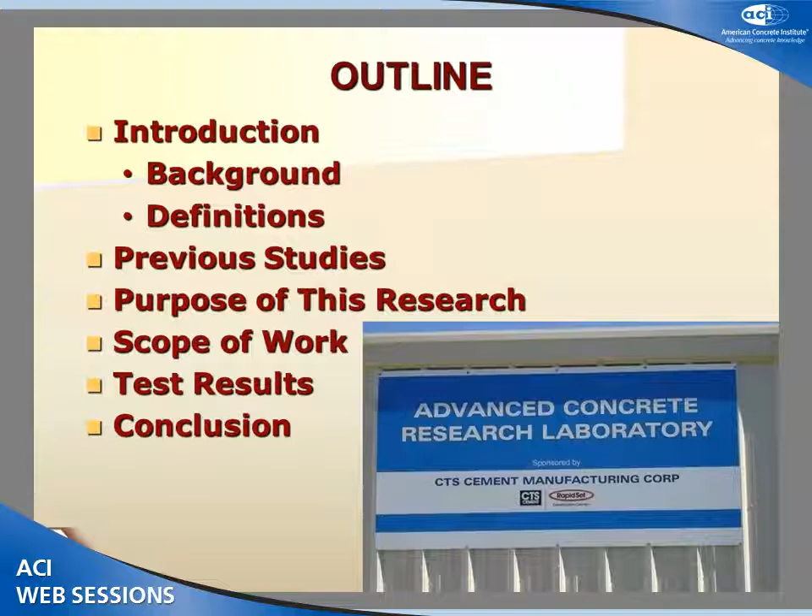About 2/3 of all the concrete in the world is used as slabs on ground, and many problems are encountered in practice with slabs on ground. As a huge amount of the concrete is used as slabs on ground, the maintenance becomes a concern.

One of the major causes of the maintenance needs for slabs on ground is the volumetric distortion of slabs, which is commonly caused by drying shrinkage. Drying shrinkage results in cracking in the concrete, and if drying shrinkage is not controlled, it can lead to serious serviceability problems and performance problems.

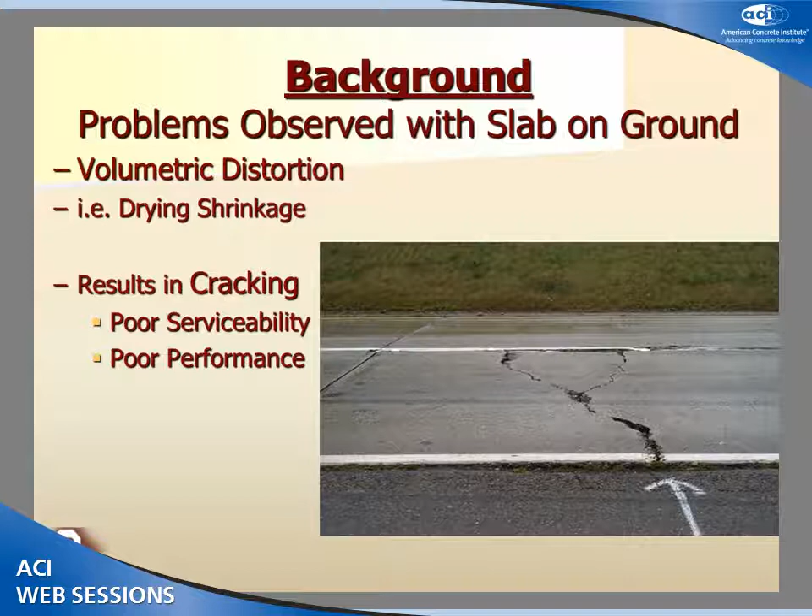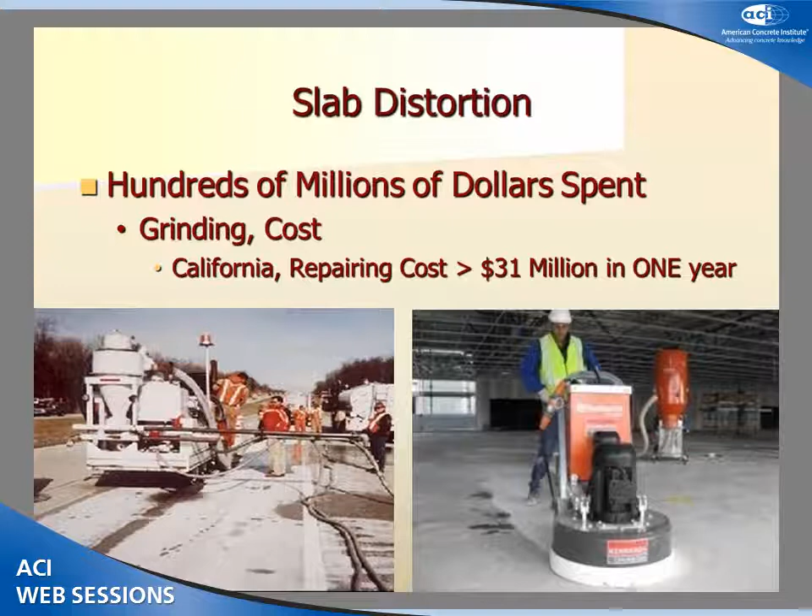So slab distortion occurs in all slabs on ground. As an example of its impact, hundreds of millions of dollars are being spent to repair slab distortion. Grinding is a common method used to repair the slabs, but it is very expensive. For example, the state of California spent over $31 million to repair its road only in 1 year. So if we could prevent or at least reduce the effect of drying shrinkage, we can save money and time.

So what is drying shrinkage? Drying shrinkage is defined as reduction in volume of the concrete due to loss of water. When the concrete dries, the free water evaporates from the top surface of the concrete. So the top surface of concrete shrinks, while the bottom surface and core of the slab concrete doesn't tend to shrink as much as the top surface. So a differential shrinkage develops through the depth of the slabs.

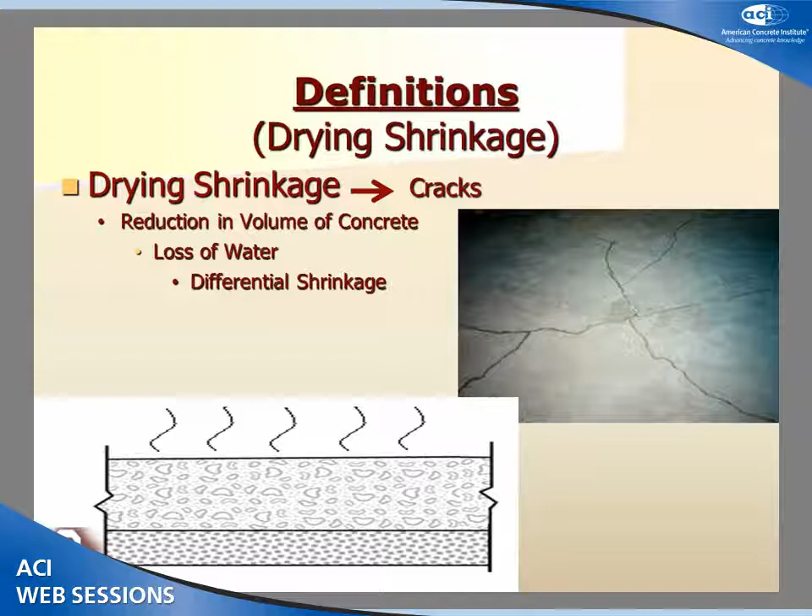And in reality, shrinkage is always restrained. So the combination of the restraint and shrinkage causes tensile stress to develop through the depth of the slabs. And if this tensile stress exceeds the tensile strength of the concrete, then the crack occurs in the slabs.

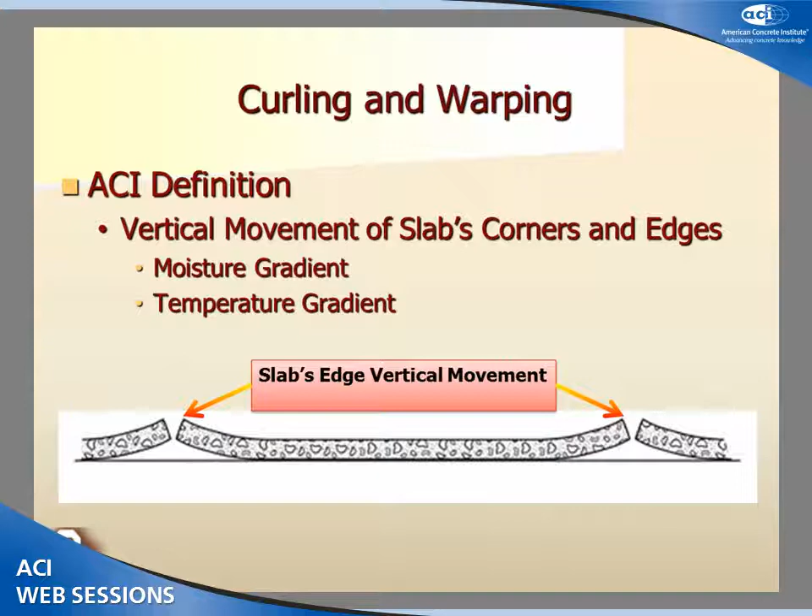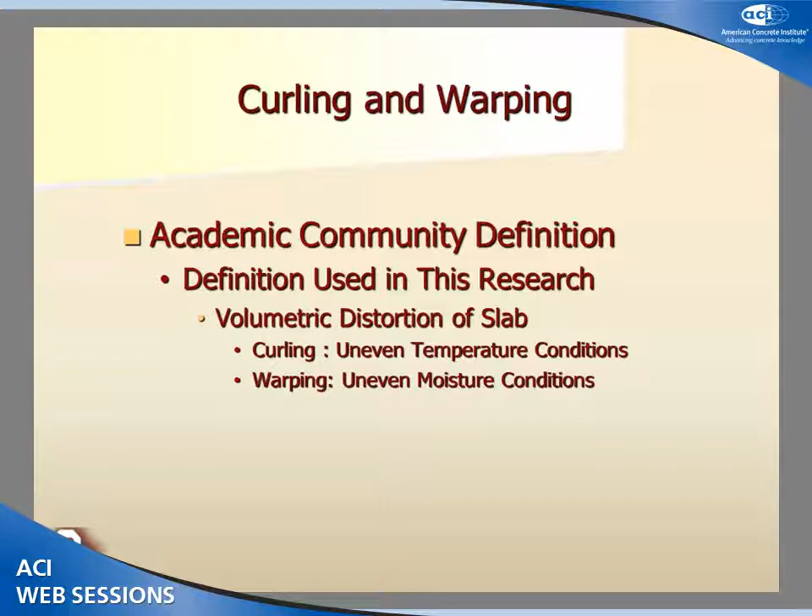So volumetric distortion of slabs on ground is actually curling and warping, and ACI defines this as a vertical movement of slab edges and corners due to moisture gradients and temperature gradients. We have another definition in the academic community that divides volumetric distortion of slabs into two things: curling, which occurs due to uneven temperature conditions, and warping, which occurs due to uneven moisture conditions. We use this definition in our research, and we focus on warping, which is due to uneven moisture contents through the depth of the slabs. So curling and warping could be upward or downward.

Upward curling and warping occurs when the top surface of the concrete shrinks due to a drier or cooler area at the top surface compared to the bottom surface of the concrete. This is typical for internal slabs. And downward vertical movement of the concrete at the edges occurs when the top surface of the concrete expands due to higher temperature or higher relative humidity at the top surface of the concrete.

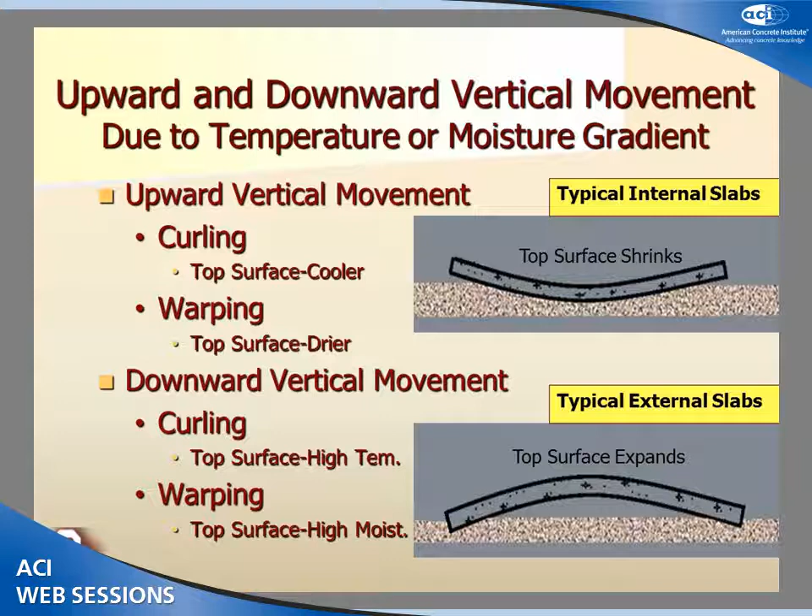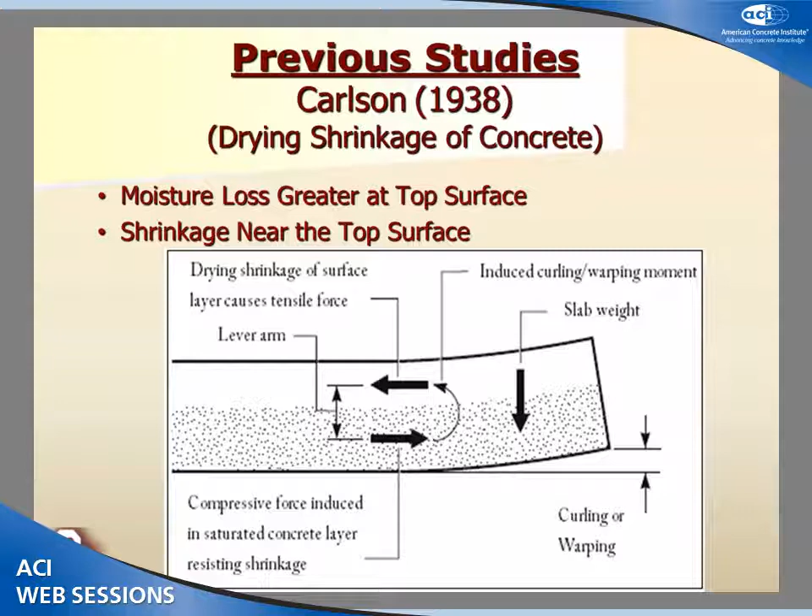Now I'm going to review some of the prior research in this area. In 1938, Carlson had an experimental study on drying shrinkage of concrete. He studied 3 types of cement and 2 types of aggregate, and he showed that the moisture loss is greater at the top surface of the concrete, and also the shrinkage occurs near the top surface of the concrete. So he concluded that when the moisture loss occurs at the top surface of the concrete, a moisture gradient develops through the depth of the slabs, and the moisture gradient causes a shrinkage gradient, and the shrinkage gradient applies the curling or warping moment into the slabs.

In 1975, Carrier and his group studied the moisture content of a 10-inch pavement and 2 bridge decks. One of the bridge decks was formed on plywood forms which were removed after curing the concrete, and one of the bridge decks was formed on metal forms which stayed in place.

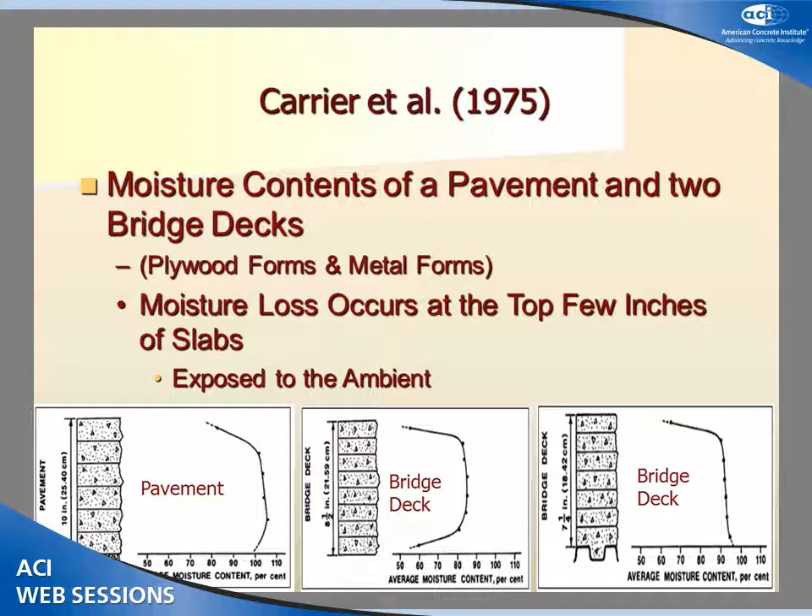You can see his results based on the first one: on the left is pavement, which has just the top surface exposed to the ambient; the second is bridge deck, which has both top and bottom surfaces exposed to the ambient; and the last is the bridge deck formed on metal forms with only the top surface exposed to the ambient. He concluded, based on his graphs, that moisture loss occurs at the top few inches of concrete exposed to the ambient.

In 1987, Ytterberg studied shrinkage and curling, particularly for interior slabs. Based on his study, the common causes of shrinkage cracking and upward curling were high relative humidity of the subgrade, low relative humidity of the top surface of the concrete or ambient, and free water in the concrete. He recommended that to minimize these cracks and shrinkage, we should use distributed reinforcement, shrinkage-compensating concrete, or post-tensioning slabs, or remove the factors that restrain the shrinkage.

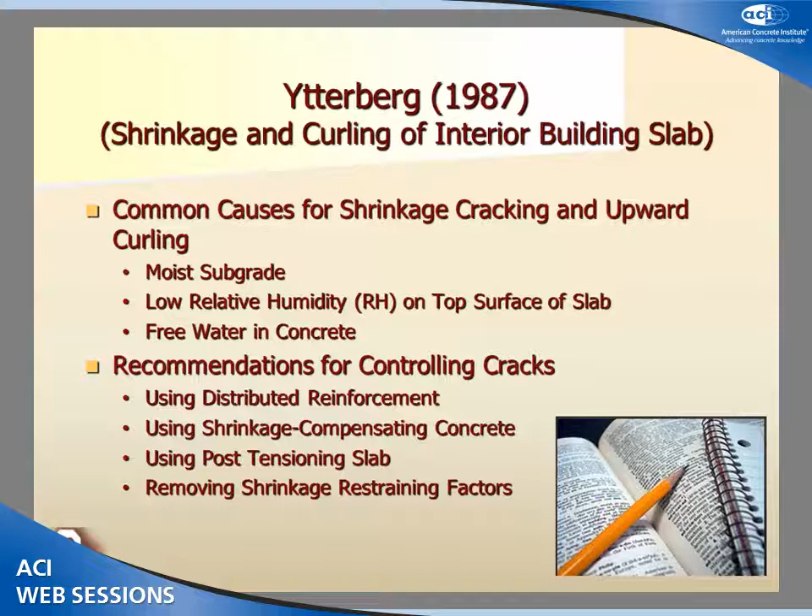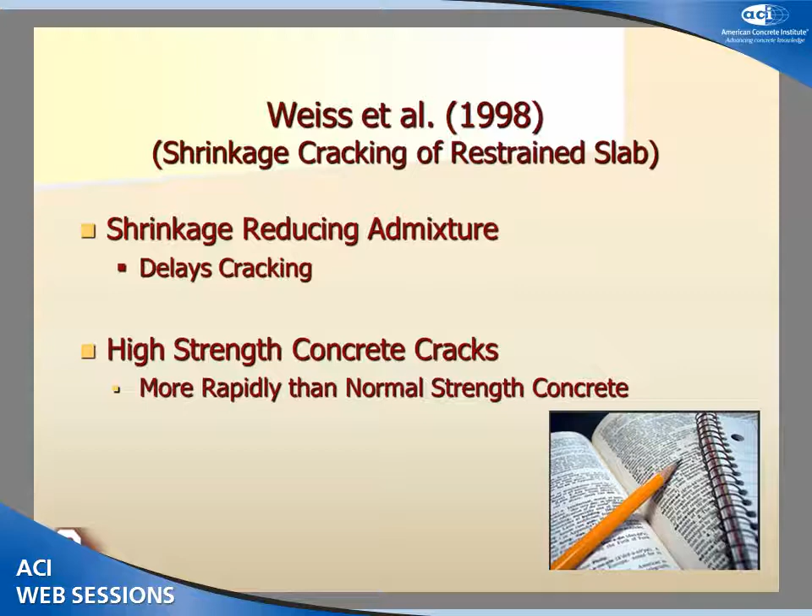In 1998, Weiss and his group studied shrinkage cracking of a restrained slab, and showed that shrinkage-reducing admixture delays the cracking, and high-strength concrete cracks more rapidly than normal concrete.

In 2007, Bissonnette and his group studied drying shrinkage, curling, and joint opening of slabs on ground. They showed that curling and joint opening occur at early age and relate to drying shrinkage. In other words, the rate of developing curling is proportional to the drying shrinkage. They also found that when they increased reinforcement in the slabs, they noticed cracks at midspan.

So they concluded that high stiffness reinforcement can cause cracks to occur in the slab.

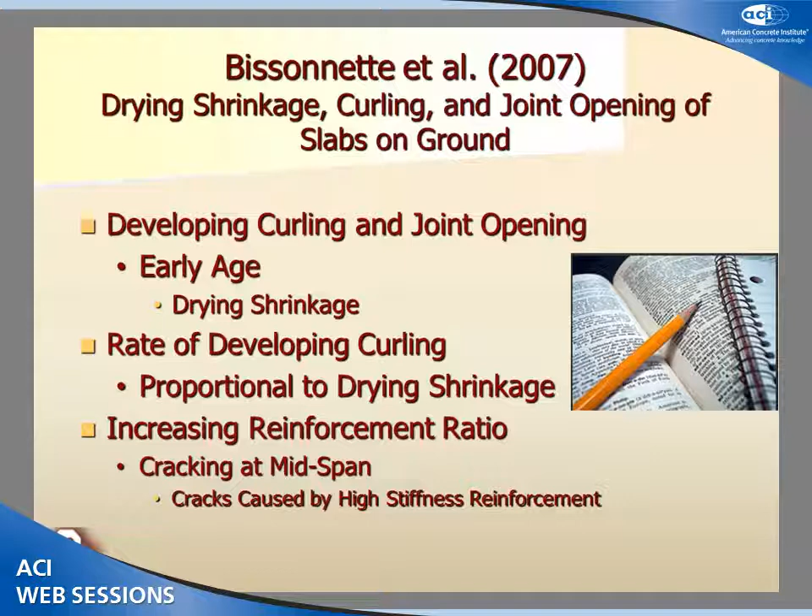Just a quick note that we follow Bissonnette's test method in our research. The purpose of this research is to improve our understanding of the dimensional stability of concrete, and also to compare shrinkage and warping sensitivity of various materials such as Portland cement concrete, high-performance cement concrete, shrinkage-reducing admixture, and calcium sulfoaluminate type K.

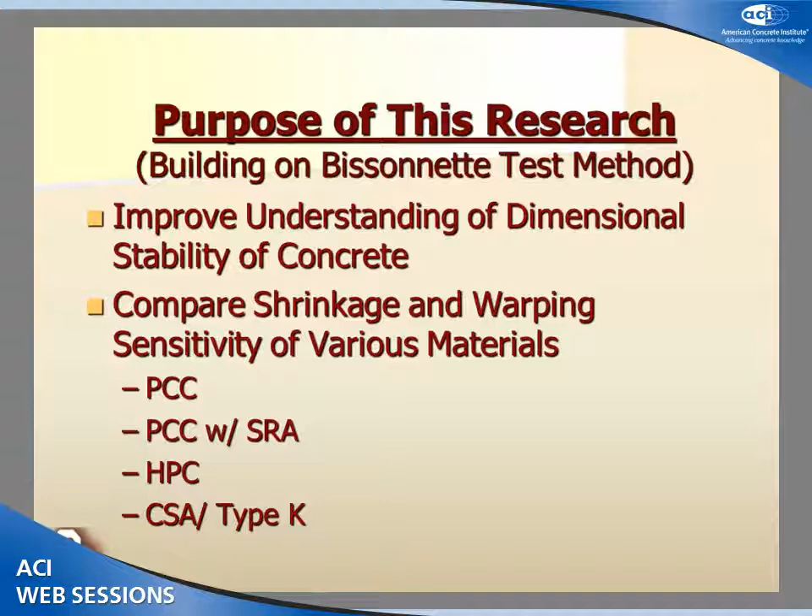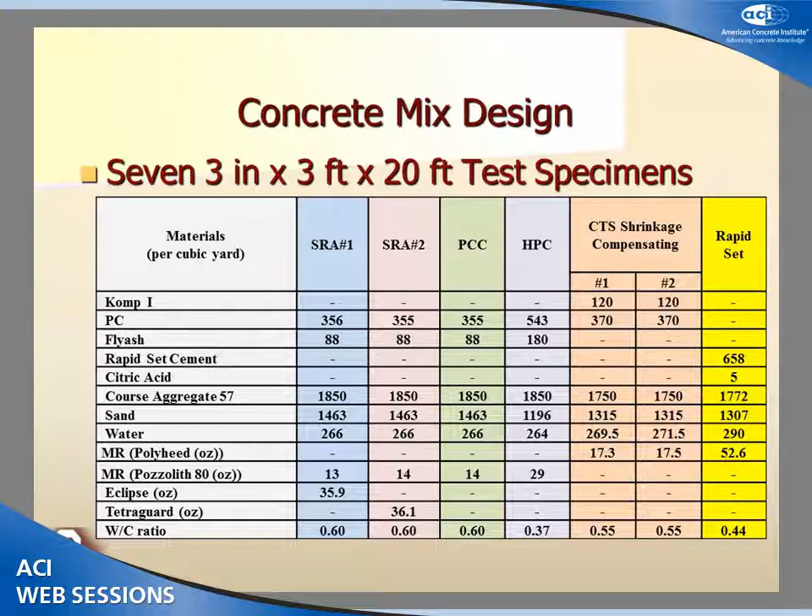We simulated slabs on ground with 7 large-scale slabs. The size of our slab specimens is 3 inches by 3 feet by 20 feet. Here you can see the table of the concrete mixes we used for our research.

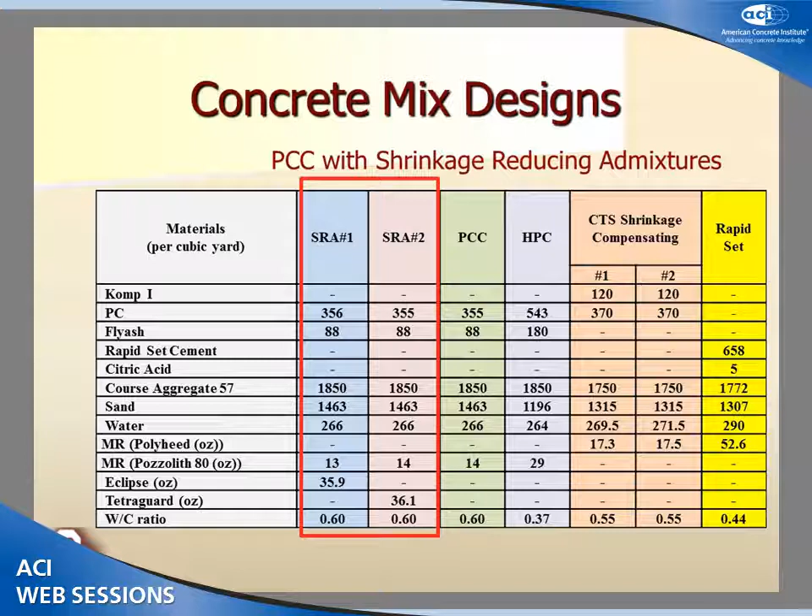2 of the slabs were made with Portland cement concrete and 2 common types of shrinkage-reducing admixtures. We used Eclipse and Tetragard for our research. One of the test specimens was made with Portland cement concrete, and the only difference between this mix and the first 2 shrinkage-reducing admixture mixes is the shrinkage-reducing admixture itself. All the Portland cement concrete mixes are the same.

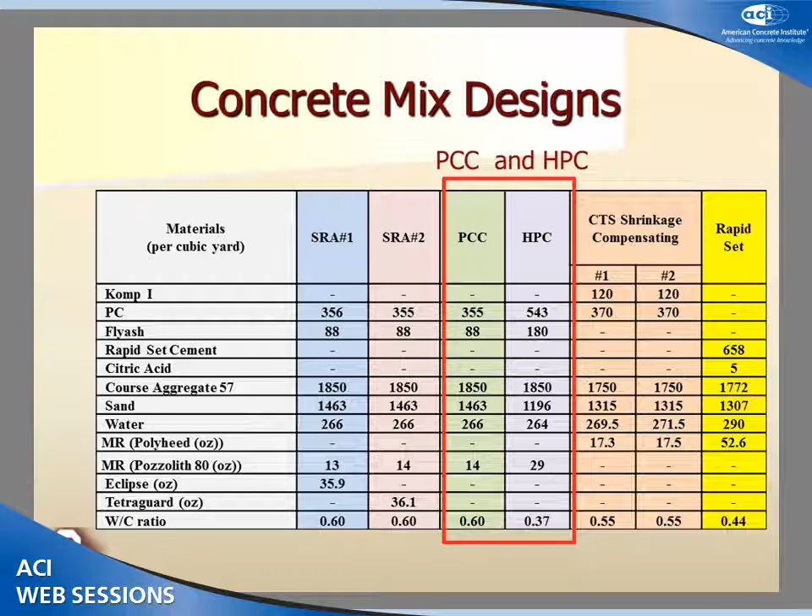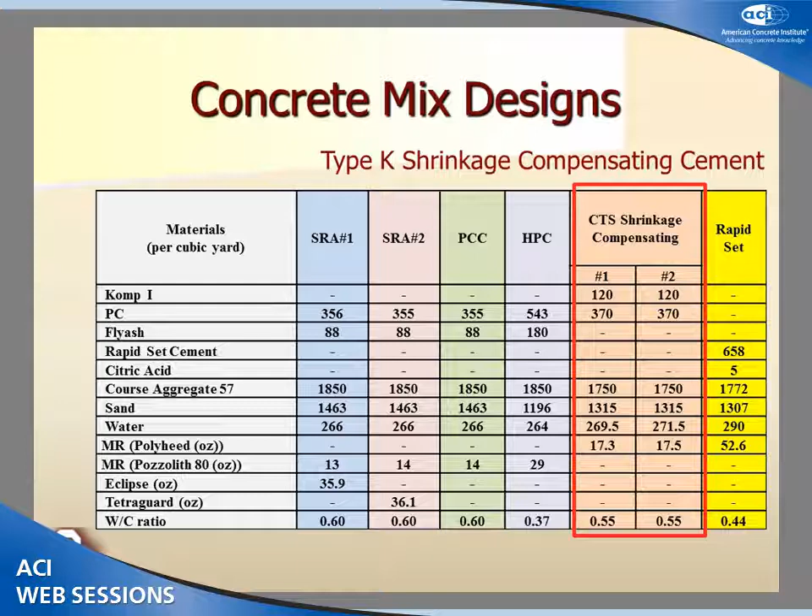From now on, I'm going to take you through the method of our research, to simulate the restrained shrinkage of the slabs on ground.

We used steel trusses at the ends. We made the steel trusses and welded them to the plates. These plates were bolted and grouted to the existing slabs.

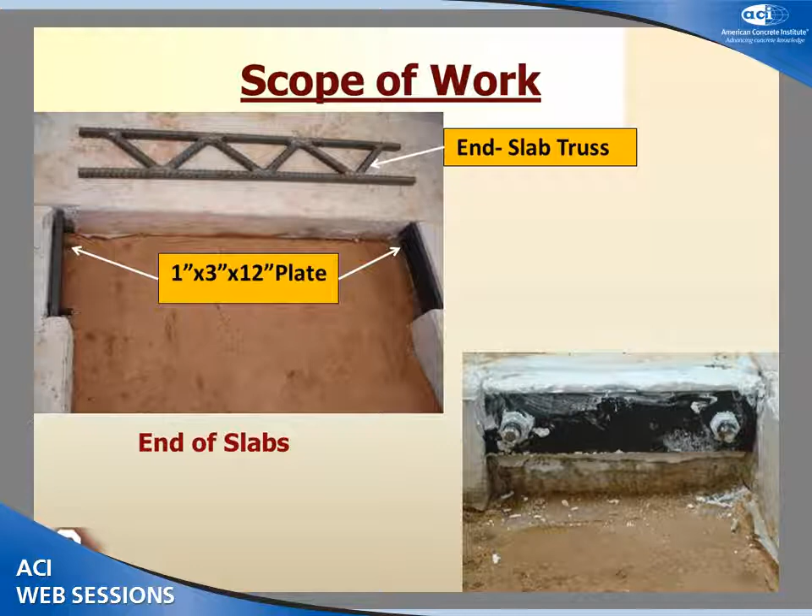These steel trusses were welded at mid-height of the plates, and we also welded 4 number 2 bars based on the ACI 360R minimum required temperature reinforcement.

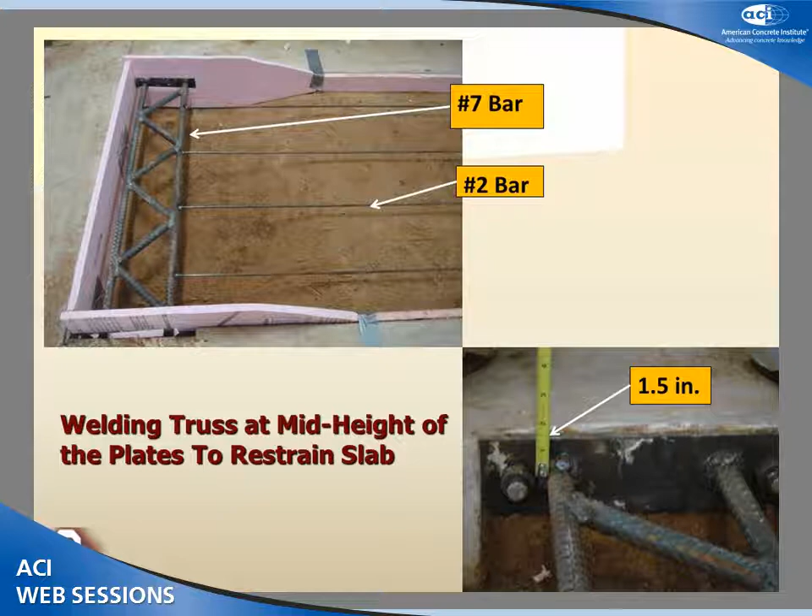The ends of the slab specimens are 9 inches. This way we restrain the slabs by casting concrete all around the steel trusses for 9 inches. This is the end of the slabs. We also used 1-inch foam as a form, and as a divider between our slab specimens and the existing slab.

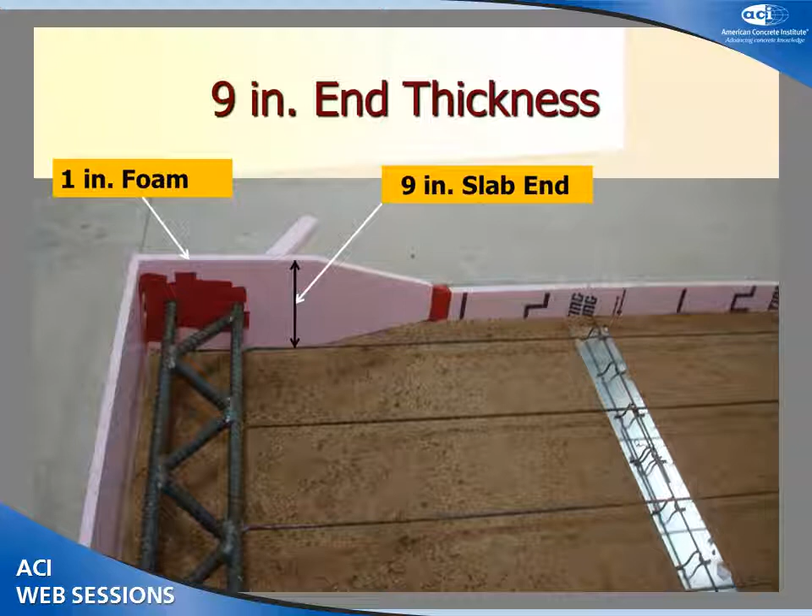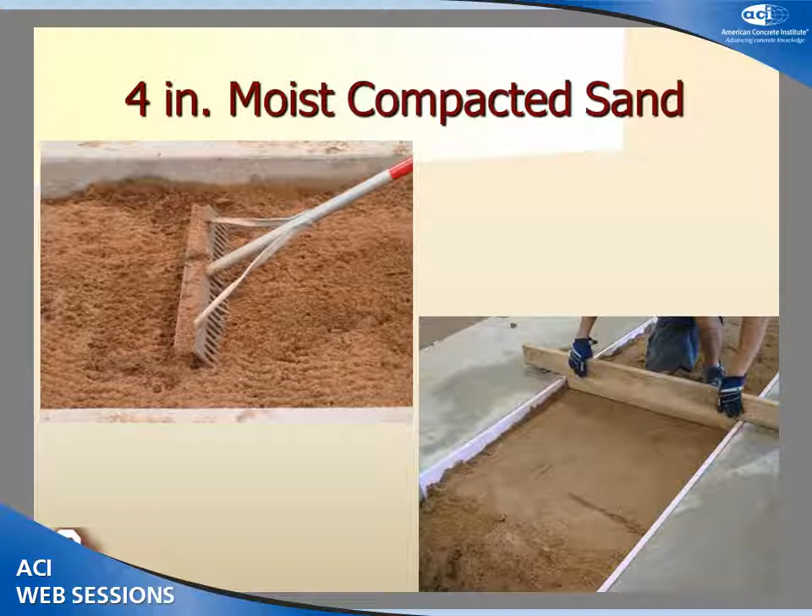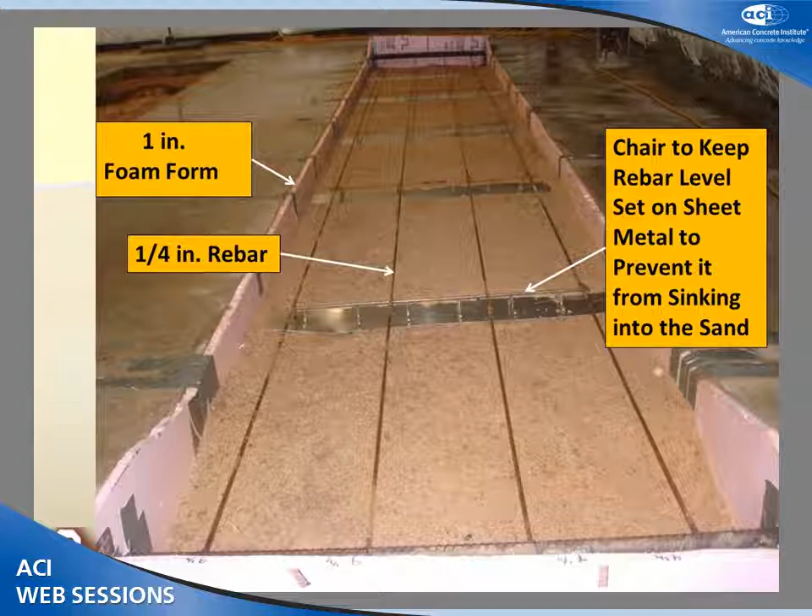Our slab specimens were located on 4-inch moist compacted sand. This picture shows the compacted sand, and here we're wetting the sand. This picture shows a slab bed ready to be filled with concrete, and you can see the bars and the chair we used to keep the rebar level at 1.5 inch depth of the slabs.

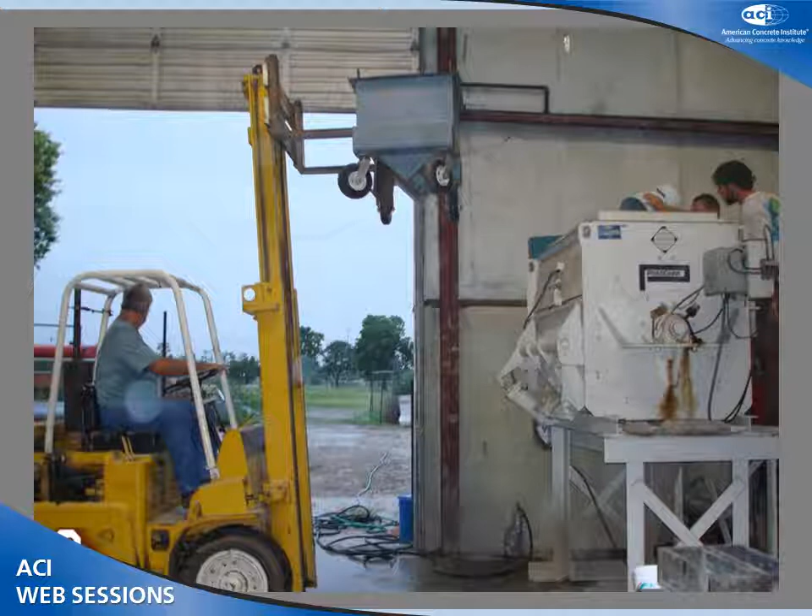Three of the mixes were batched at the University of Oklahoma's facility at Fears Lab, and we used ready-mix concrete from the Dolese company for four of our slab specimens.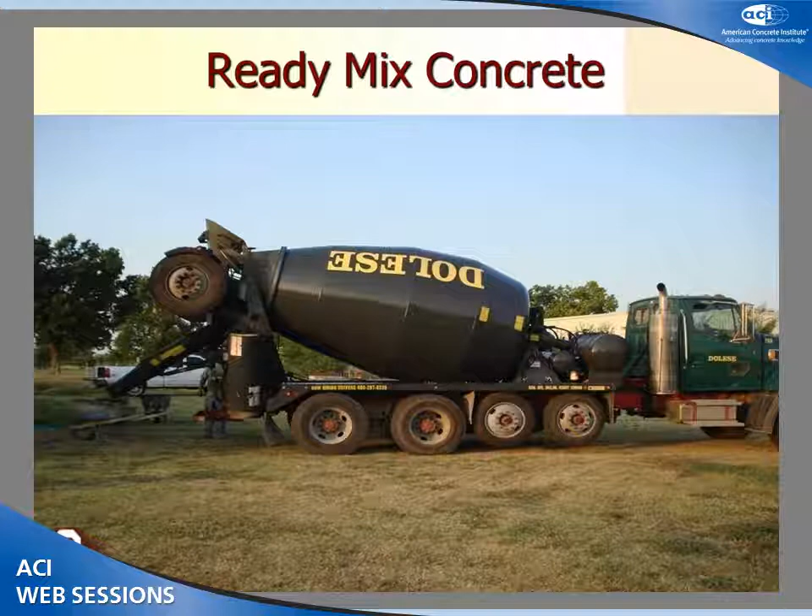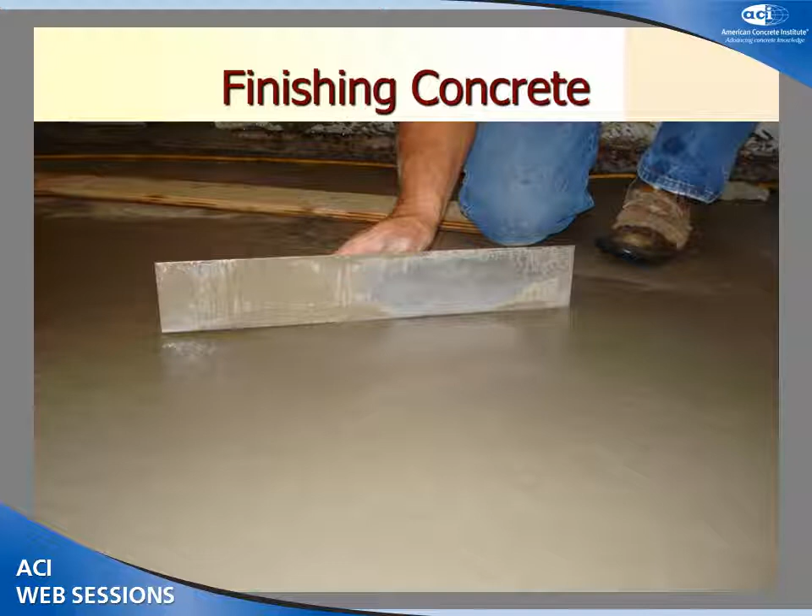Here is a picture showing pouring the concrete into the slab bed. After pouring the concrete, the finishing crew finished the top surface of the concrete, and here are the finished slabs after all the work we've done.

Contraction joints were cut at 5 feet from the end of the slabs to provide a 10 foot long central test section for our research. The depth of these joints is 1 inch.

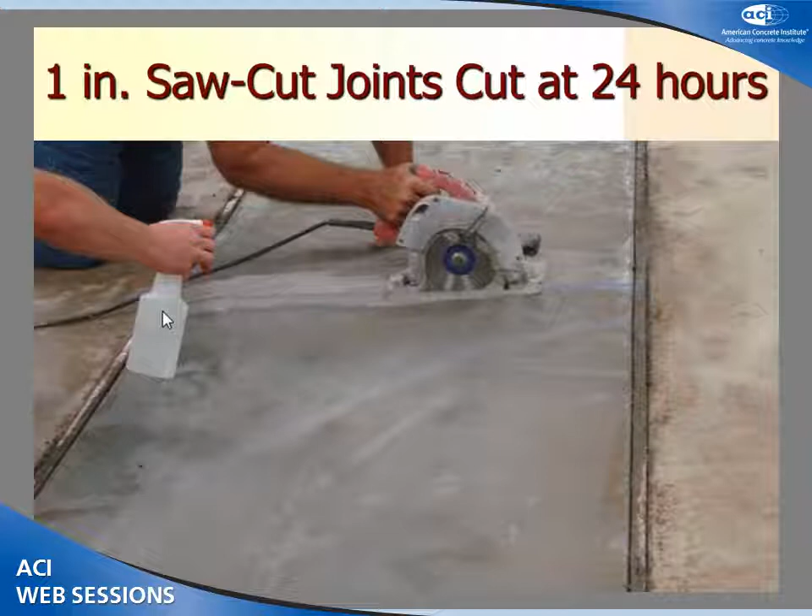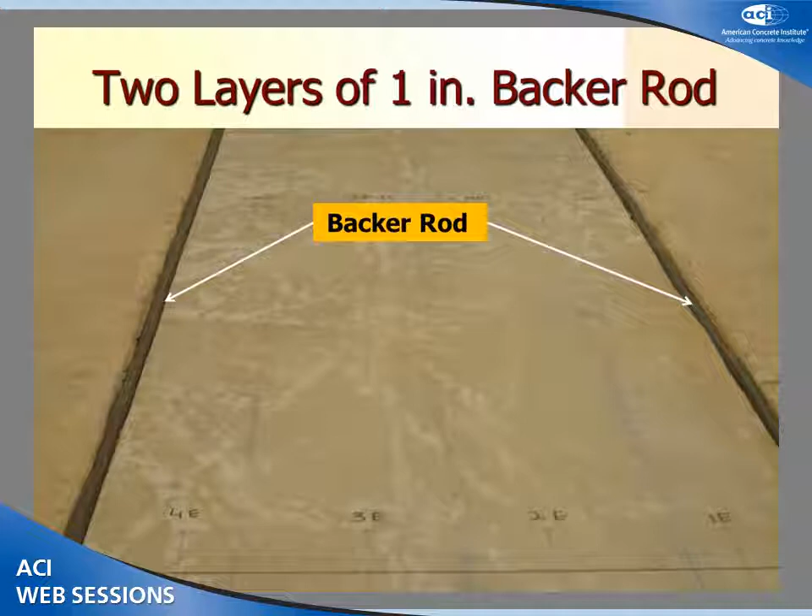We cured all the concrete slabs for 7 days with wet burlap and plastic sheet. After that, we removed the forms all around the concrete and placed the flexible 1 inch backer rod in 2 layers all around the concrete slab specimens. In this picture, you can see our slab specimens are located on the ground, with the top surface exposed to the controlled environment.

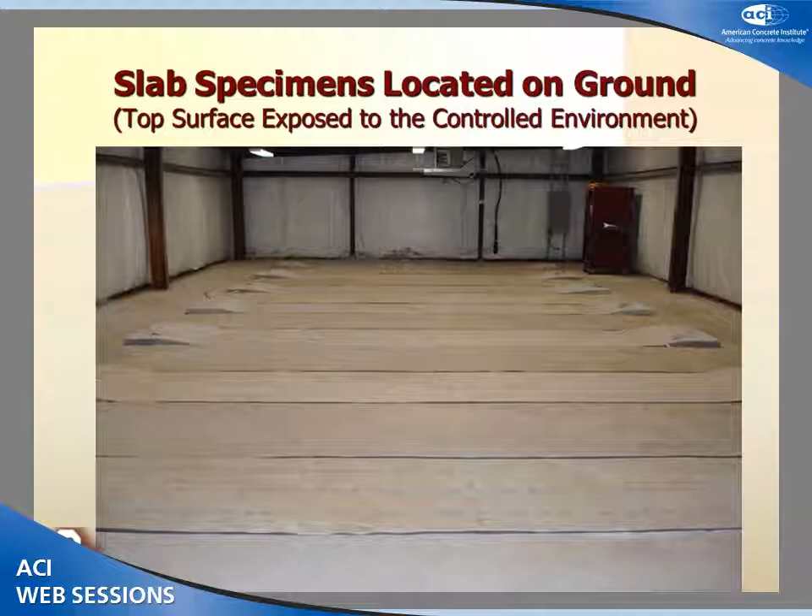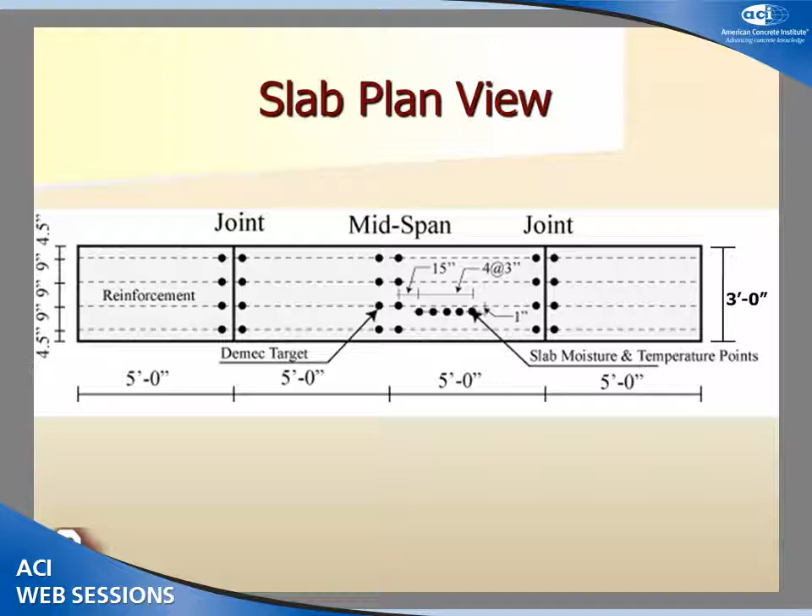This picture shows the overall plan view of the slabs. You can see the location of the joints I already told you about—contraction joints placed at 5 feet from the end of the slabs to provide a 10 foot long central test section. We also attached some demec targets at the joint opening and mid-span to measure the surface strain. I'll go through this later in our test results.

This picture shows the profile of the slab deformation due to warping, and you can see the location of the warping. I wanted to show you the end restraint of the concrete here in this picture.

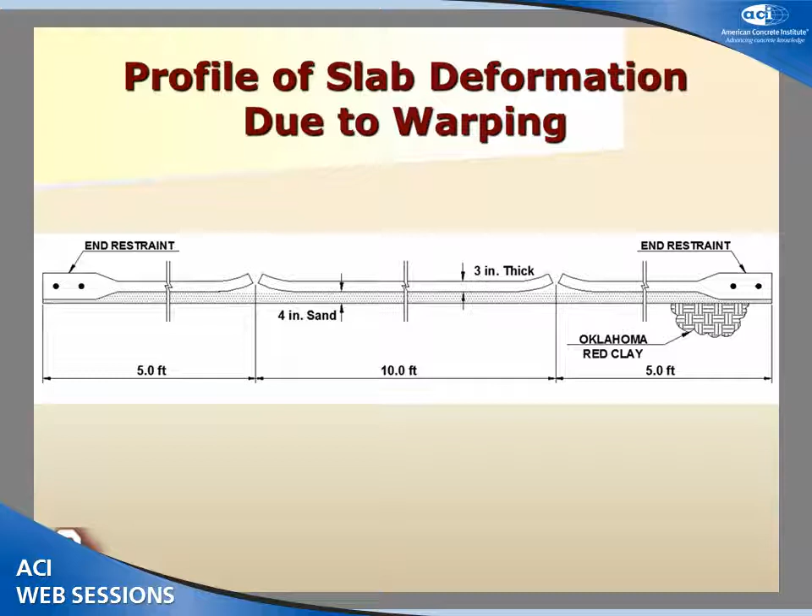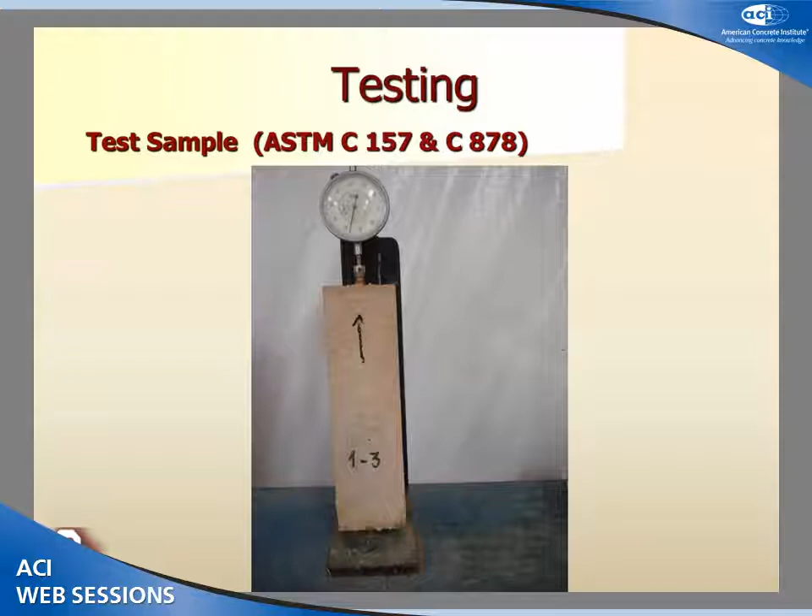Now I'm going to review some of our data from our research. We took some samples from each batch to test ASTM C157 and C878, which are unrestrained shrinkage test and restrained shrinkage or expansion test, respectively. I'm going to review some of the data we got from these ASTM tests.

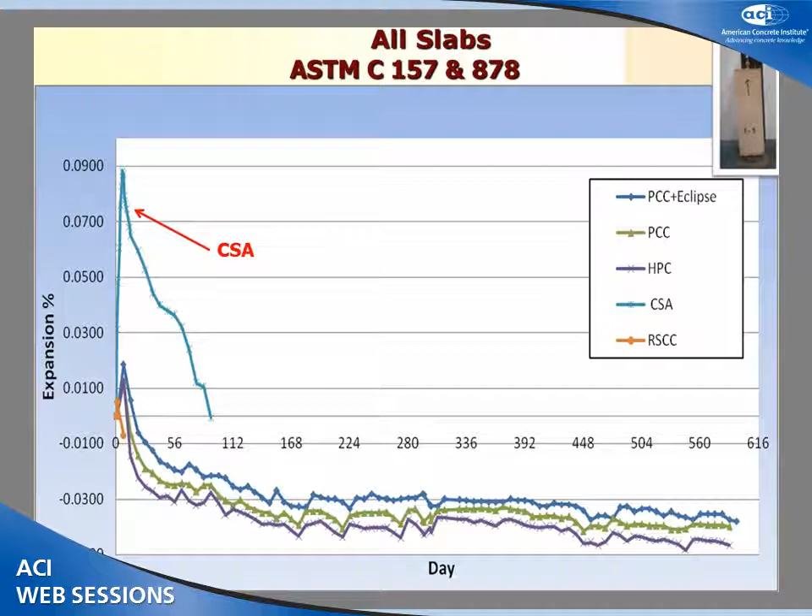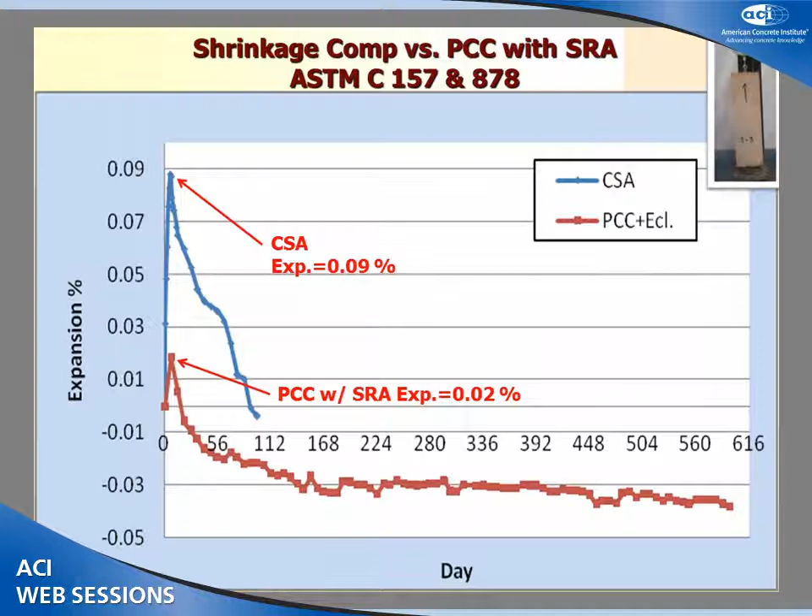I wanted to show you the expansion of calcium sulfoaluminate at the first days of curing, comparing it with one of the shrinkage reducing admixtures in this picture. This graph shows that calcium sulfoaluminate has a 0.09% expansion at the first curing week, while the shrinkage reducing admixture has 0.02%, which means calcium sulfoaluminate's expansion is about 4 times greater than the shrinkage reducing admixture.

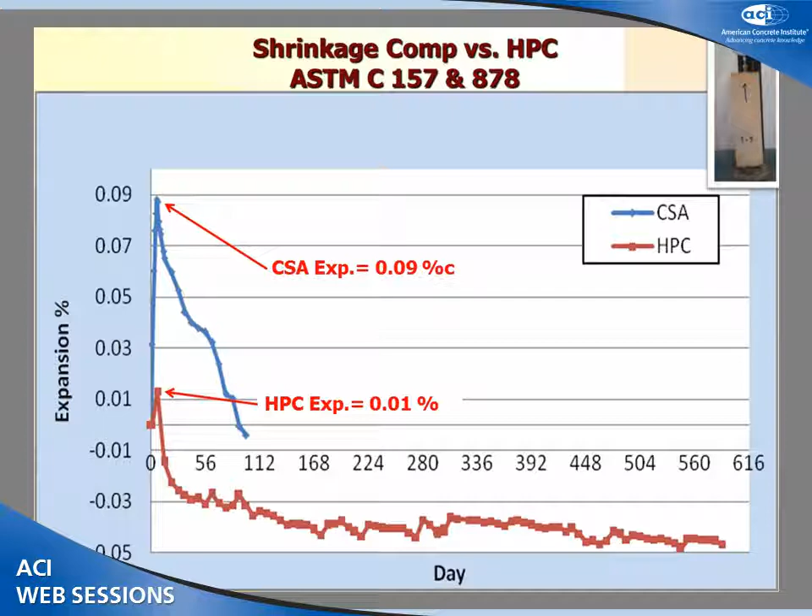In this graph, I wanted to show the calcium sulfoaluminate expansion you already saw, which is 0.09%, compared to the high performance concrete, which is about 0.01%. Calcium sulfoaluminate showed 9 times greater expansion than the high performance concrete at the first week of curing.

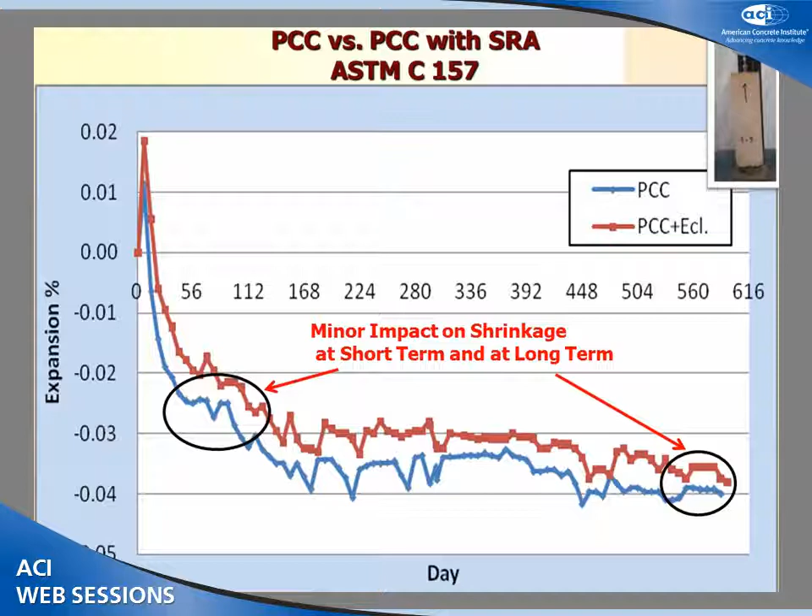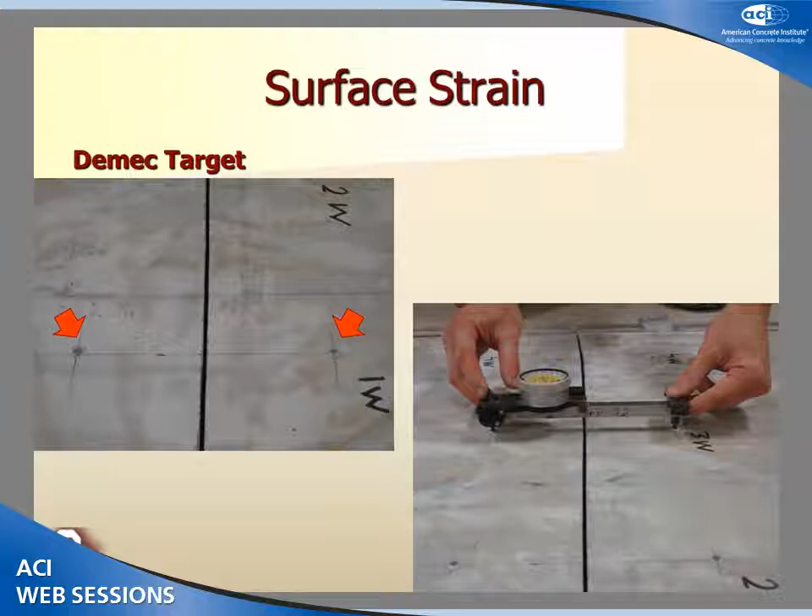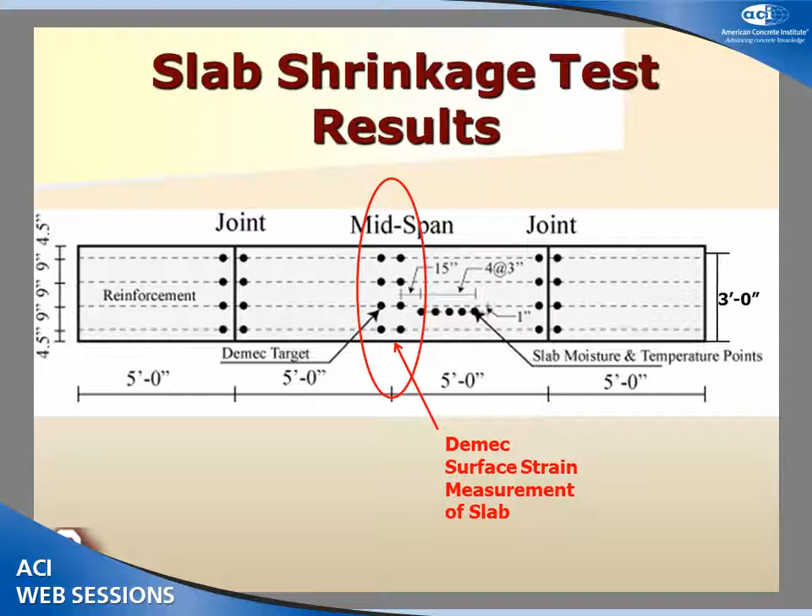As I mentioned before, we attached some demec targets at the joint opening and mid-span to measure the surface strain of the concrete slabs on ground, and here is the gauge we used to measure this. Now I'm going to review some data we measured at the mid-span of the slabs, located on the slabs and measured at the mid-span.

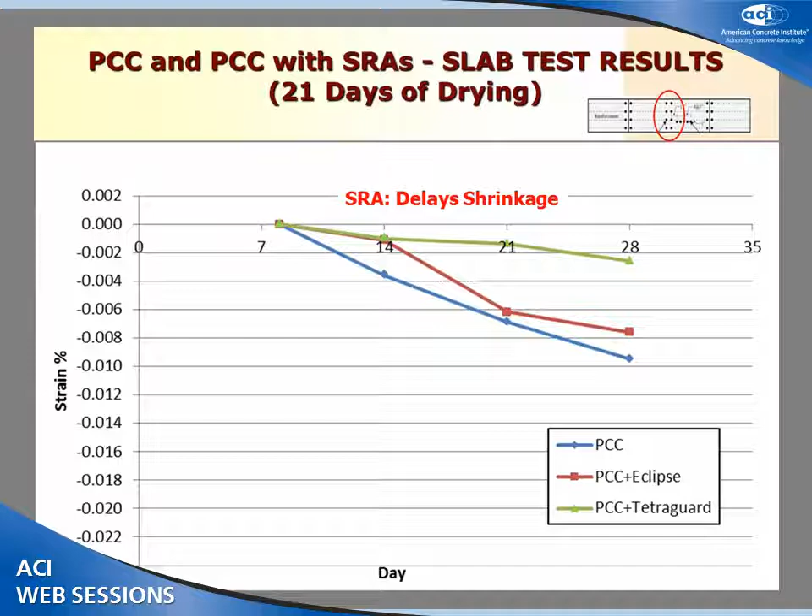This graph shows the Portland cement concrete and shrinkage reducing admixtures we used, both for 28 days, which is 21 days of drying. You can see the shrinkage reducing admixture delays the shrinkage in these first few weeks.

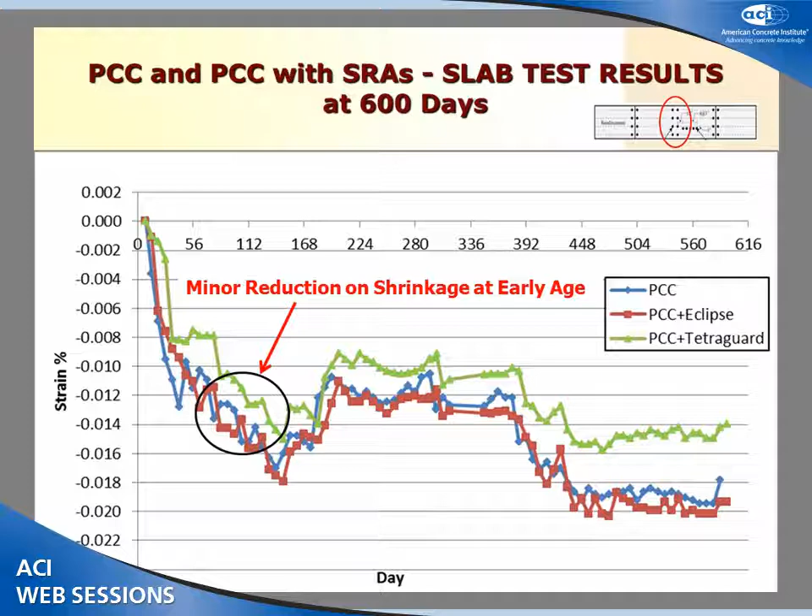And here is showing the slab results for 600 days, showing there is a minor reduction on shrinkage at early age, and almost none at long term, for the 600 days of results.

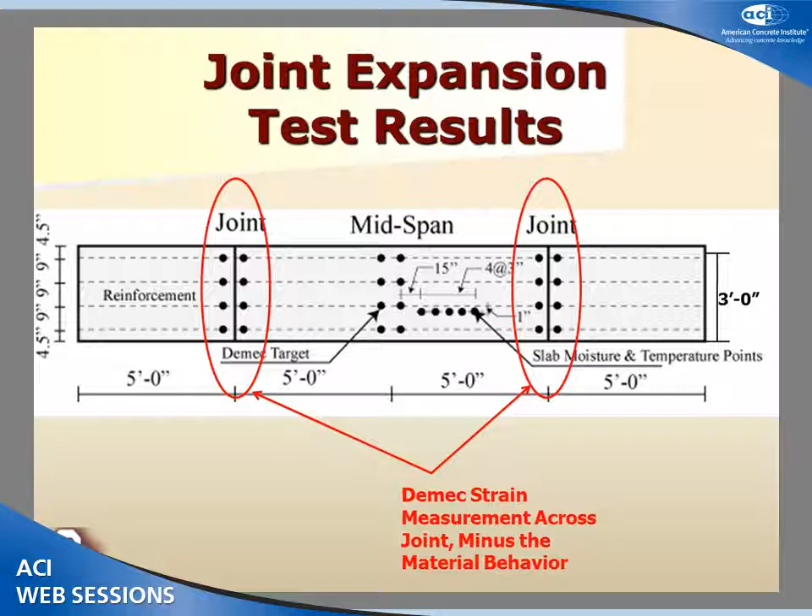Now I'm going to review some of our joint expansion results measured at joint opening from the Demec target. This is showing the measurements of the crack growth at the joint opening results.

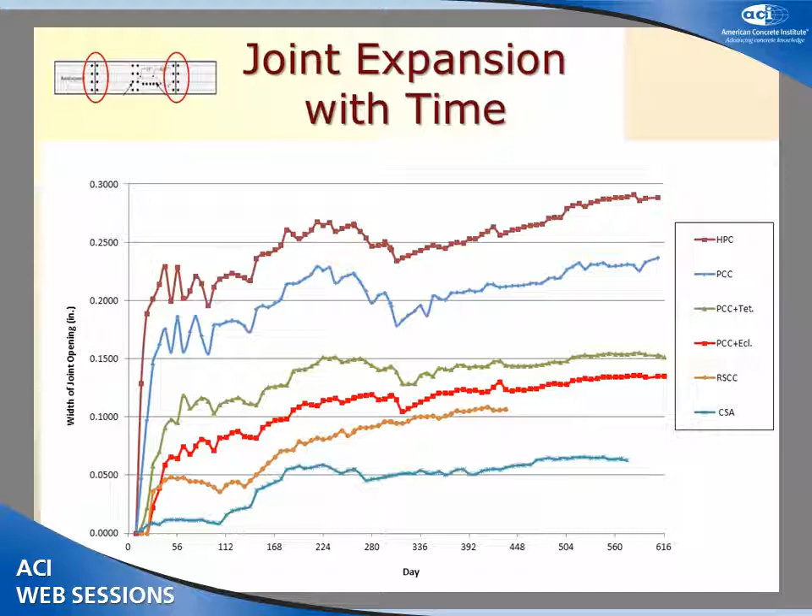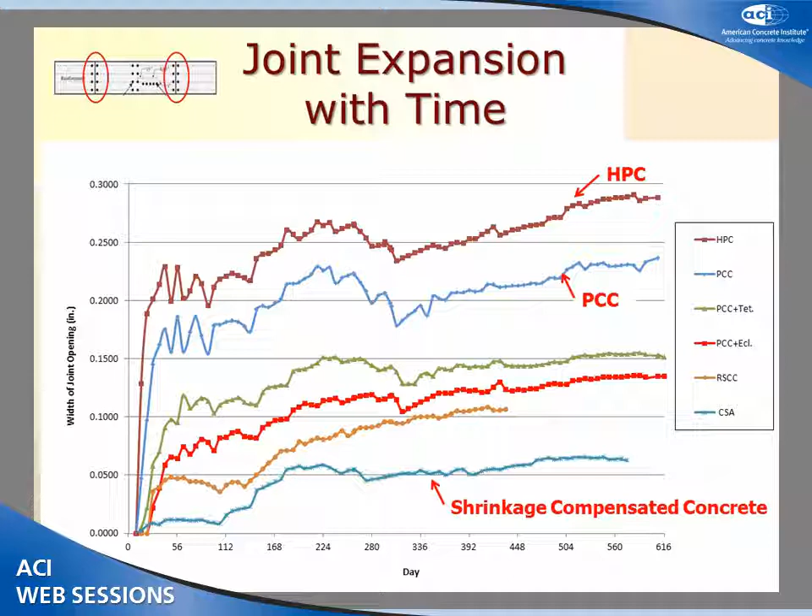Here is the graph for all the slabs and mixes we use, showing the joint expansion. At the top we have high performance concrete, which shows the largest expansion, and at the bottom line we have shrinkage-compensated concrete, which shows very low shrinkage or joint expansion for our slabs on ground.

This graph shows the joint opening, joint expansion for the normal concrete. As you can see, shrinkage starts at early age for Portland cement concrete, and this shrinkage or expansion continues for a long term. We measured this for about 600 days, and we still notice the joint expansion continue after about 2 years.

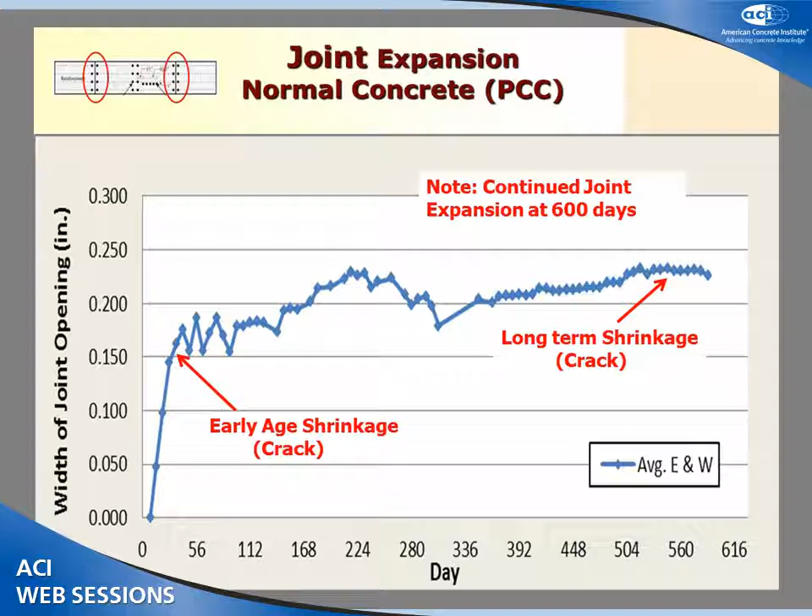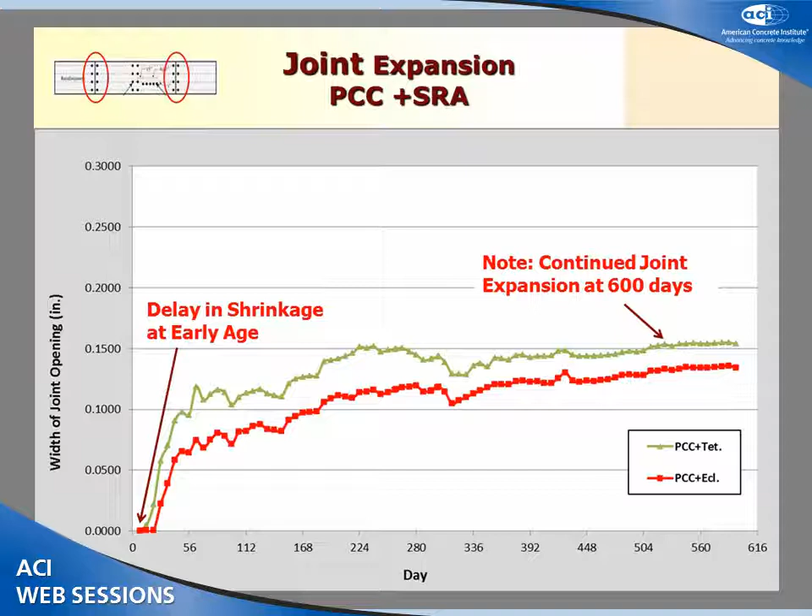Here is showing the Portland cement concrete, two types of shrinkage reducing admixture joint expansion, and again you see the delays in shrinkage using shrinkage reducing admixture, and also you can see the shrinkage in these two types of shrinkage reducing admixture continue for a long time, for about 600 days of our measurement.

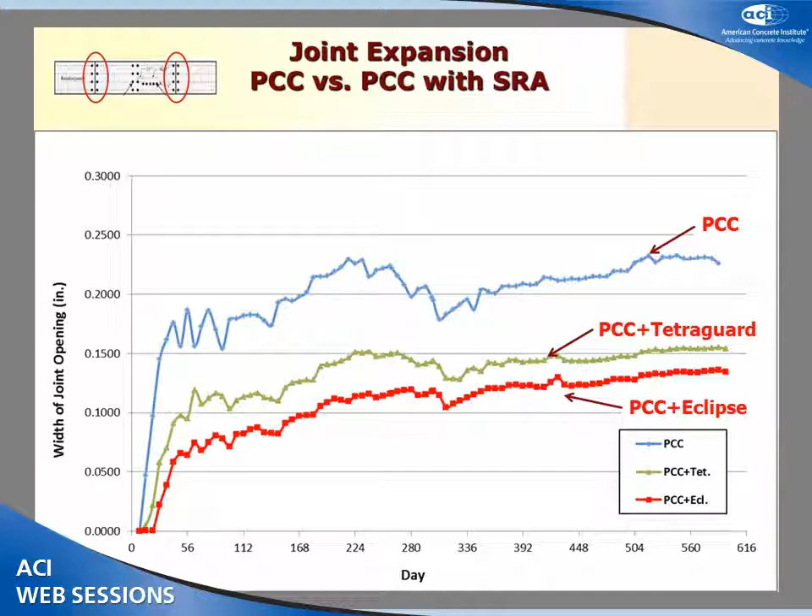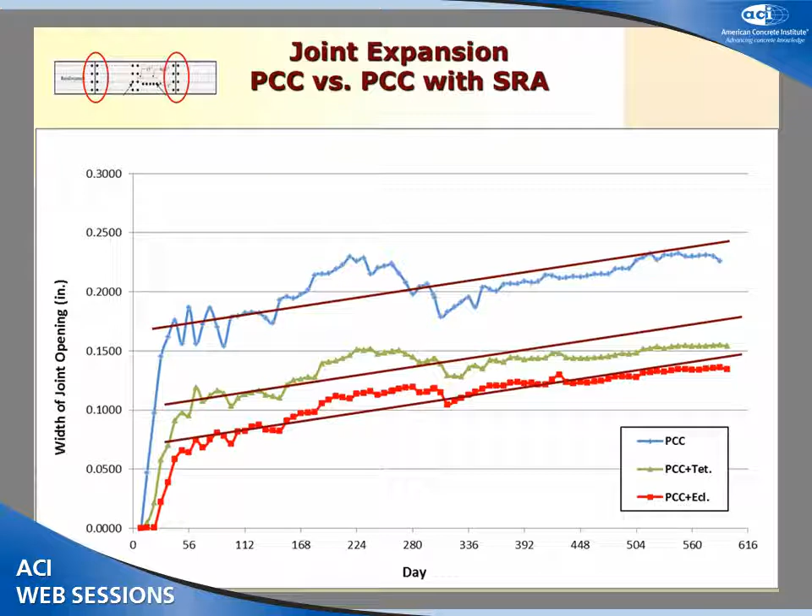In this graph, I wanted to show you Portland cement concrete versus the shrinkage reducing admixture we use. You can see if we just compare this, these graphs are actually parallel with an offset by the initial shrinkage, or we can say that with the exception of the first few weeks, they are positively correlated and have the same trend. If you look at this trend, I wanted to show you.

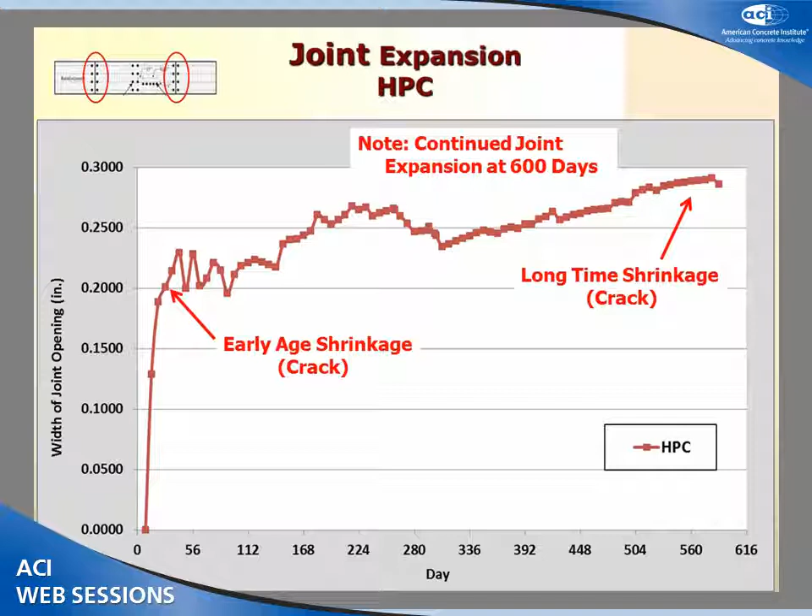This graph shows the high performance concrete, which again you can see the early age shrinkage or expansion joint, and also it's continued for a long time. After 600 days we still had a joint expansion for this type of concrete.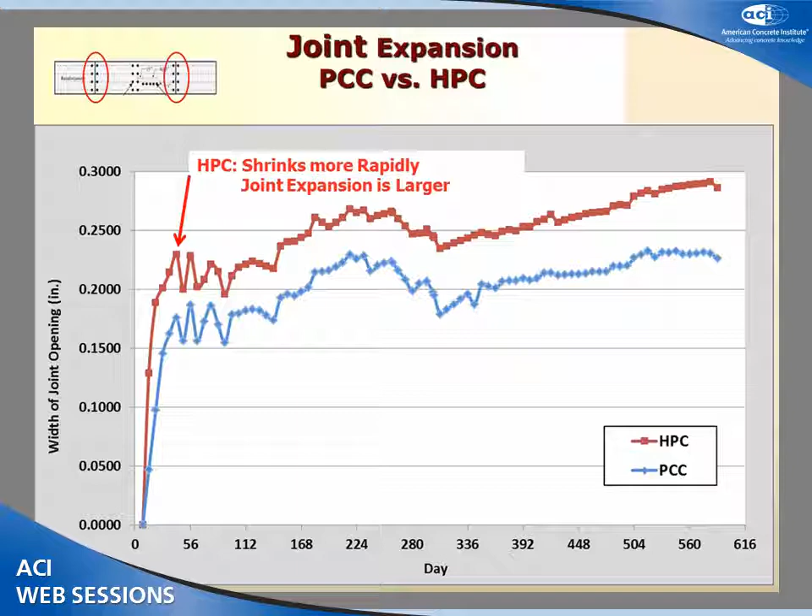In this graph I wanted to show you a comparison of the high performance concrete and Portland cement concrete, and as you can see the shrinkage of the high performance concrete is more rapid than the Portland cement concrete or normal concrete, and also the joint expansion is wider or larger than normal Portland cement concrete.

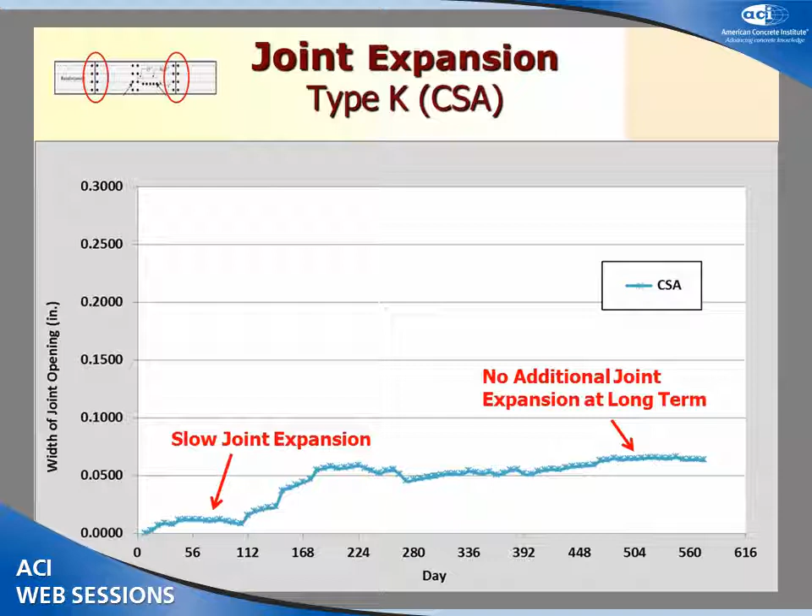Now you can see the joint expansion for type K calcium sulfoaluminate. There is a very slow joint expansion at the early age, and also we almost didn't notice any additional joint expansion after a long term.

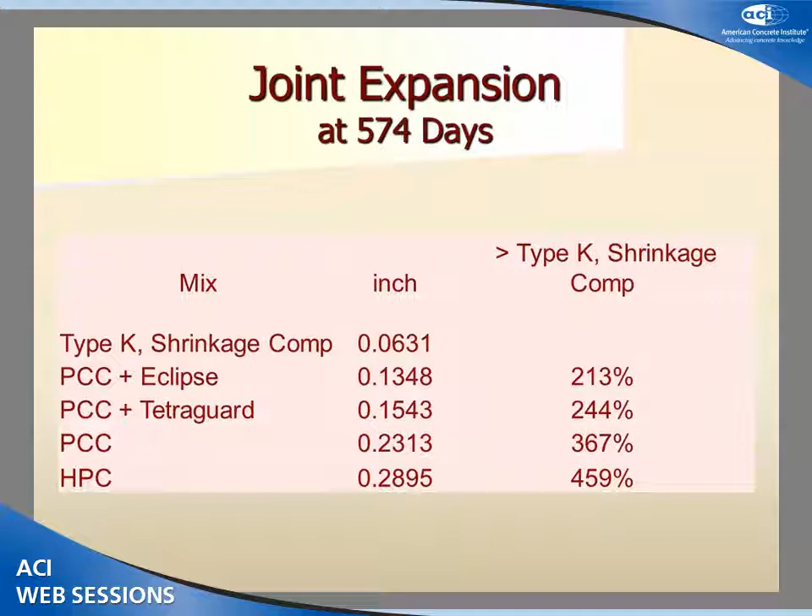In conclusion, typical Portland cement concrete, high performance cement concrete, and shrinkage reducing admixtures continue to exhibit joint expansion at approximately 2 years. As I mentioned before, this joint expansion was the crack that we measured at the location of the joint opening. We also found that ASTM C157 does not provide an accurate method to predict the behavior of material used in a slab on ground.

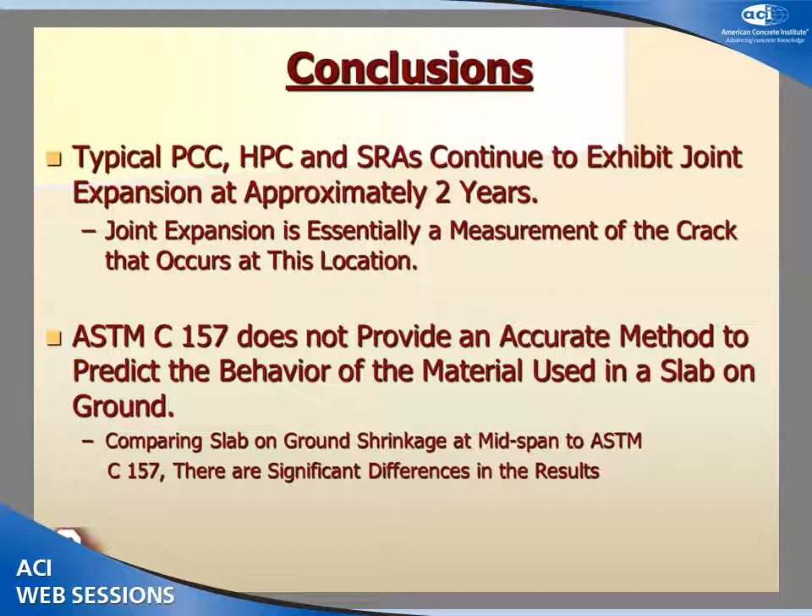We compared the results, and we found there are significant differences between the results. We also found that the shrinkage reducing admixture has a minor impact at both early age and 600 days, and is almost very close to Portland cement concrete. Finally, we found that shrinkage-compensating concrete is extremely stable with little or no long-term shrinkage or cracking.

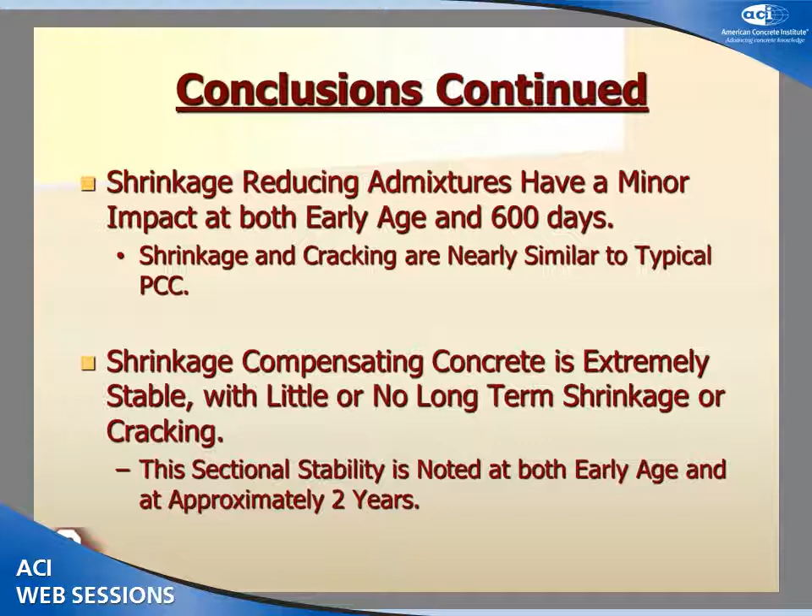This was the results at the early age and also for approximately 2 years.